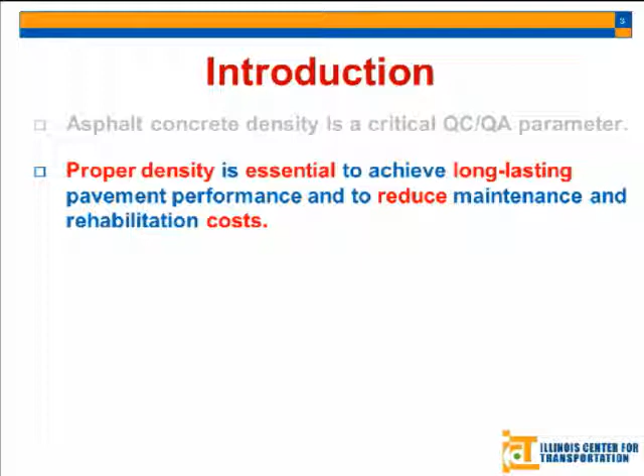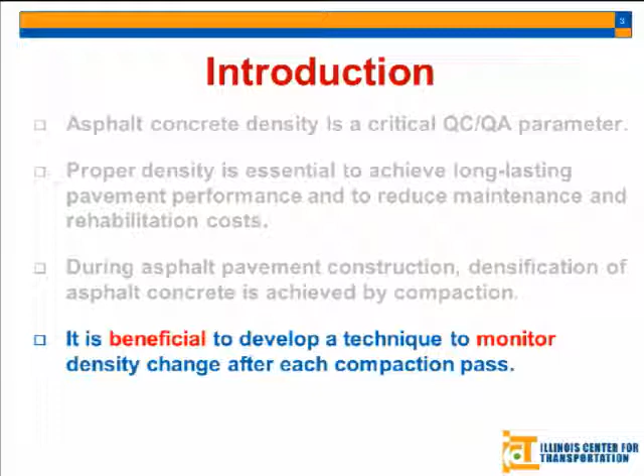During pavement construction, densification of asphalt mixture is achieved by compaction. So it would be beneficial to develop a technique that can monitor the density change after each compaction pass. However, no current technique can really achieve that.

Here are several techniques used for QC/QA methods. For example, the coring method is destructive and time consuming, and it can only give you information after construction—no information can be provided during compaction.

The nuclear density gauge uses radioactive material, so it requires certain licensing to operate and store. And its biggest limitation is that it's a spot test, so it only provides density information at certain discrete locations.

People then developed a new non-nuclear density gauge that doesn't use radioactive material. However, it's still a spot test, meaning it still collects density data only at discrete locations.

It also requires surface contact. The reason this is a limitation is because we want to achieve continuous and rapid monitoring, so if the tool requires surface contact, it cannot achieve that goal.

Intelligent compaction is a very hot topic now. However, its limitation is that it's based on the stiffness of the whole pavement system, and we know stiffness changes with temperature and subgrade conditions. So any measured stiffness increase may not be caused by increased density—it might instead be caused by a temperature drop or a change in subgrade conditions.

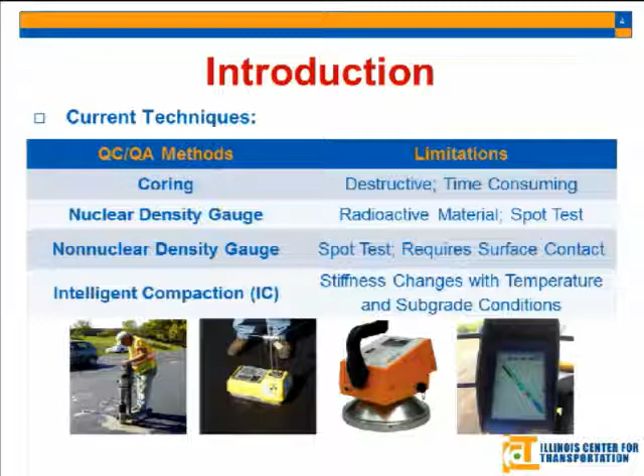So we want to find a way to overcome all these limitations and achieve real-time, continuous, and rapid compaction monitoring. That's why we turn to the GPR method.

Ground penetrating radar, or GPR, has been applied for thickness and density measurement and defect detection of asphalt pavement for many years, though density prediction is just being developed. The main advantage of this method is that it's non-destructive, non-contacting with the surface, and provides continuous measurement with high coverage area. It's very rapid because it can collect data at highway speed without any interruption to traffic.

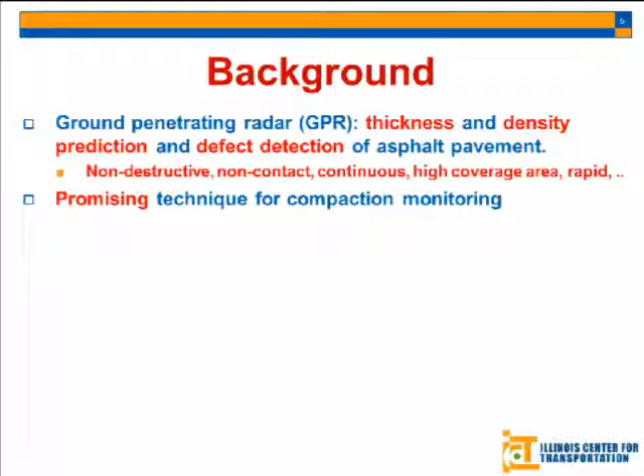So it's a promising technique for compaction monitoring. However, the biggest challenge here is GPR signal is very sensitive to water, and I'll explain why in the slides later. And the effect of this roller sprayed water on GPR signal is unknown.

As we all know, during compaction the compactor will spray some water on the roller to prevent sticking or picking up of the asphalt particles. And this water is having a big impact on GPR signal.

So we have achieved thickness and density measurement using GPR. Now the question is, can we apply the results or the theories used for density measurement and take one step further to monitor density during the compaction? As I said, the biggest challenge here is water, and we are going to tackle this water problem.

So far, for all the researchers doing GPR research, it's very hard to deal with water. There's not too much literature I found on measuring pavement with water. All the GPR tests require the pavement to be dry, or at least 3 days no raining, or maybe 1 week no raining, depending on the states and the specifications.

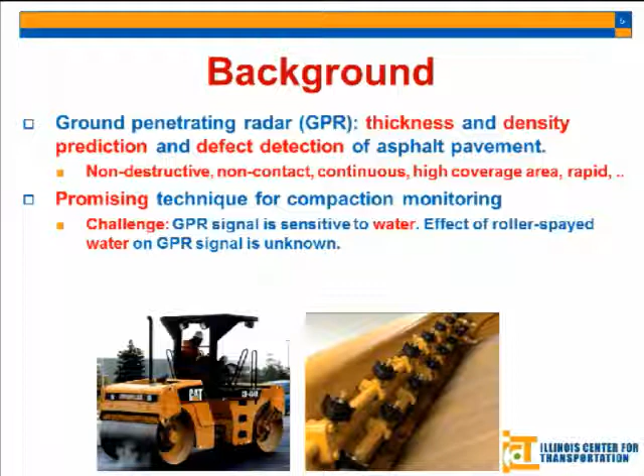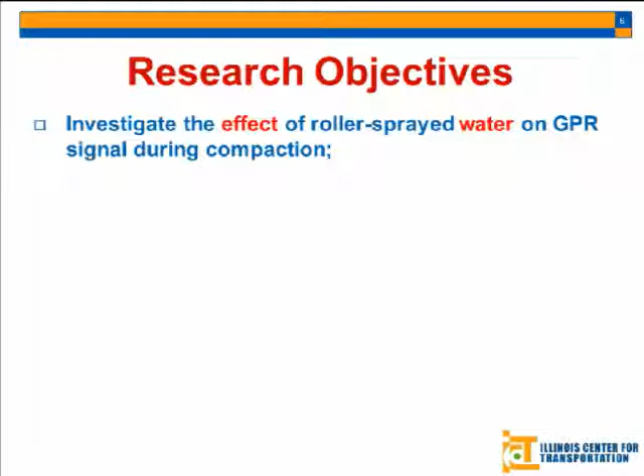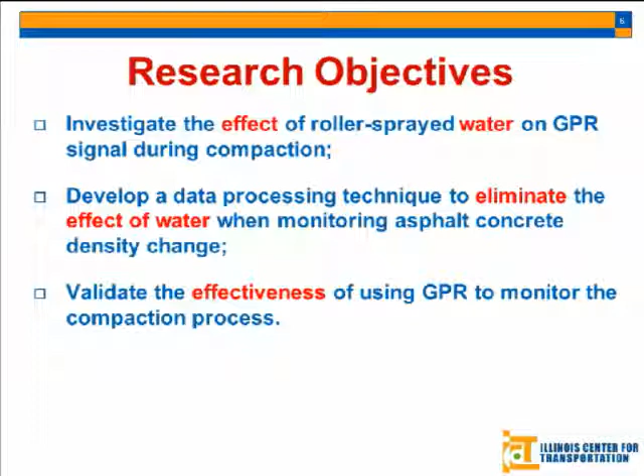So this challenge somehow defines our research objectives. First, we want to investigate the effect of roller sprayed water on GPR signal during compaction. Then hopefully we can develop a data processing technique to eliminate this effect of water. And then we are going to validate the effectiveness of using GPR, both the hardware and the software part, in the application of compaction monitoring.

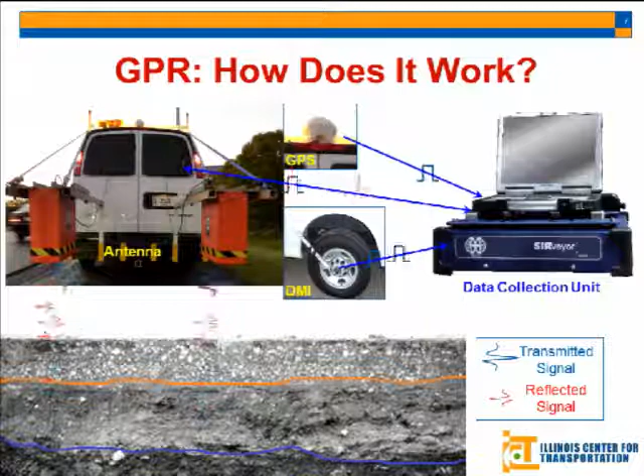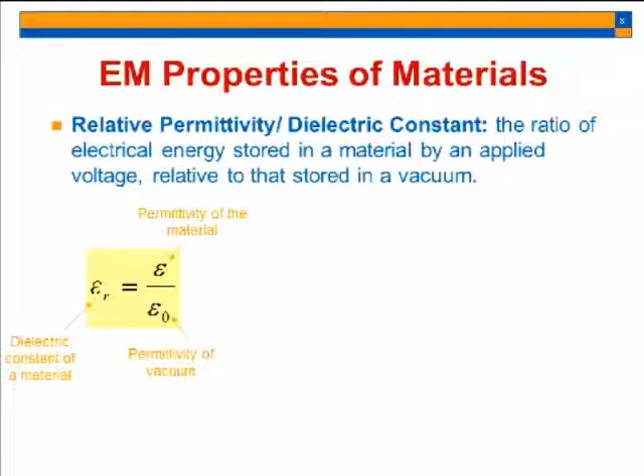This table lists several typical values of materials' dielectric constant. For example, as we said, it's relative, normalized to vacuum. So air has a dielectric constant of 1, asphalt concrete has a dielectric constant of 3 to 10, and water has 81. That's why water has a big impact on GPR signal.

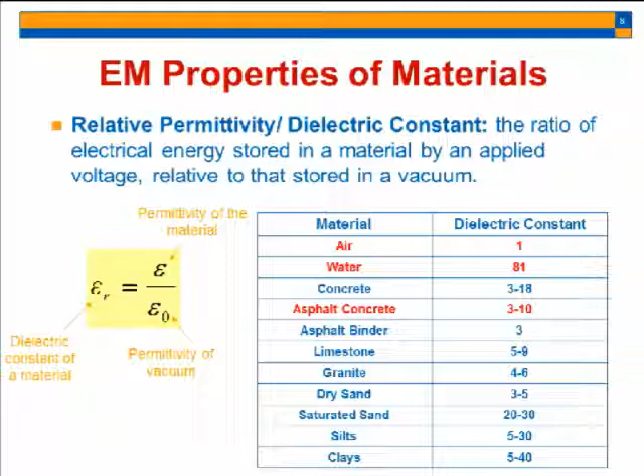I want to mention there's a relation between the dielectric constant of a material and its density. The denser the asphalt concrete is, the higher the value of dielectric constant is. So that's also the principle we can use to predict density or do density monitoring.

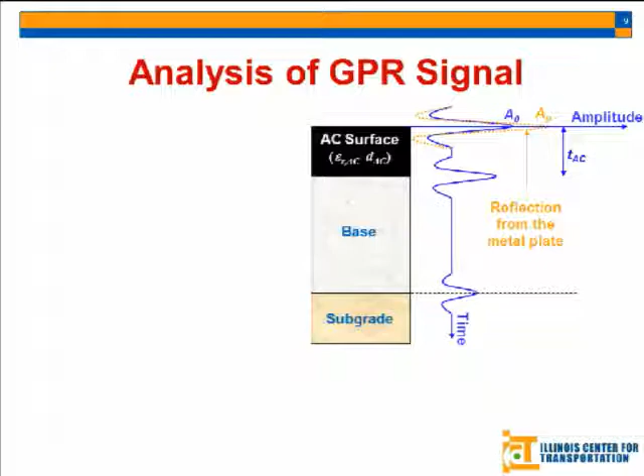This figure shows you how the EM wave, the GPR wave, propagates within the pavement. As you can see, there will be a surface reflection, there will be a bottom reflection, there will be a reflection here. We are only interested in this part of the signal because it reflects the property of this AC surface layer. We are not interested in anything below that.

There's an equation to calculate the dielectric constant of the AC layer. As you can see here, this AP is the amplitude of the incident wave, which can be collected by putting a metal plate underneath the antenna, because the metal plate is a perfect reflector, so you can know what you are sending out. And this A0 is the amplitude of GPR wave reflection at the pavement surface.

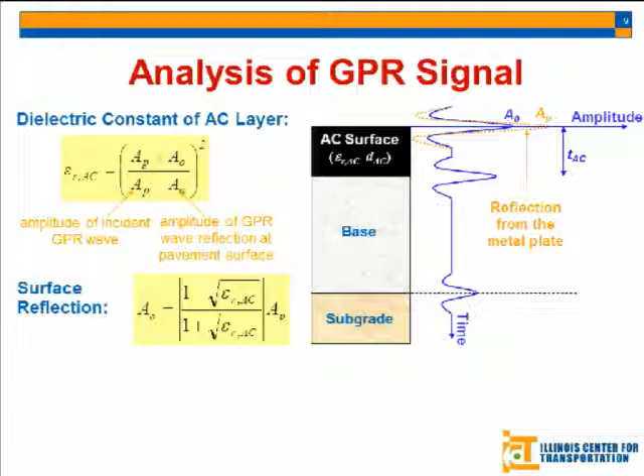In our application, we need to reorganize this. But these three equations tell us that the principle of density compaction monitoring is that when the compactor passes the asphalt mixture, the density increases. Based on this equation, when the density increases, the dielectric constant will also increase, and when the dielectric constant increases, the surface reflection amplitude will also increase. So when you place an antenna here, and the compactor passes repeatedly, you will find that the surface reflection amplitude increases and increases. That's the principle of how we monitor the compaction status.

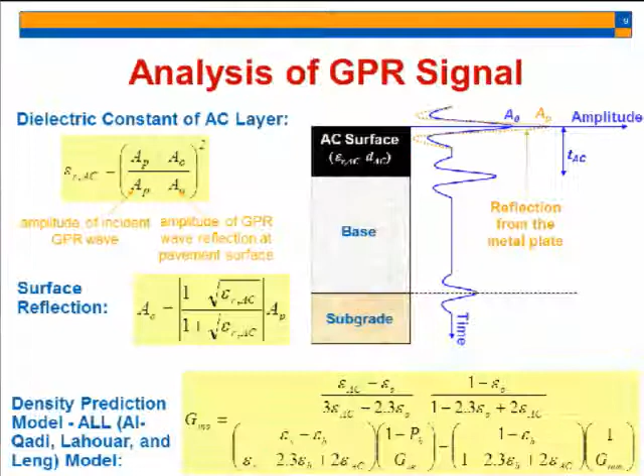However, these three equations are all based on dry pavement. As we said, the biggest challenge is water. So we are going to investigate how the water affects the signal.

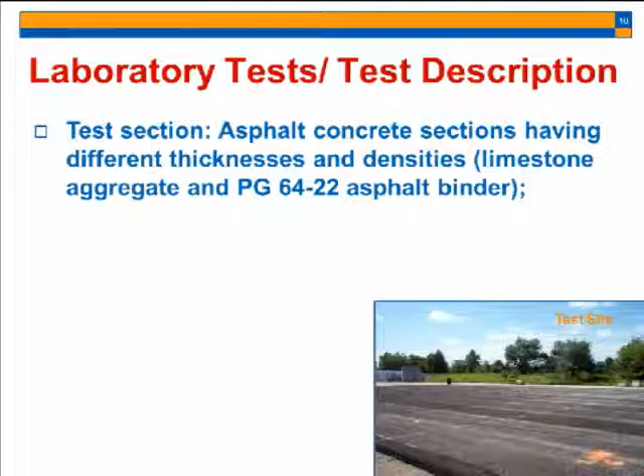We did this laboratory test outside the ATREL. There's a test section made of different thicknesses and densities, and we chose one lane made of limestone aggregate and PG64-22 asphalt binder. We use a 2 GHz air-coupled antenna. There are different frequencies you can choose for antennas, and this is the most common one for air-coupled systems. By air-coupled, I mean you don't need the antenna in contact with the surface, so we can collect data very quickly.

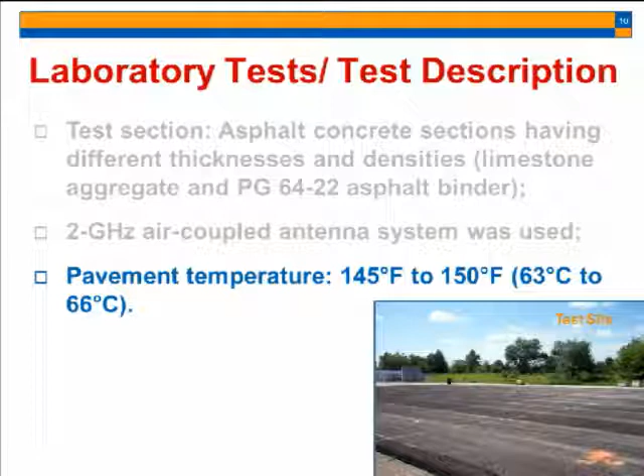The pavement temperature is pretty high because we did this test last summer. We wanted to choose the hottest day so that any water we sprayed on the pavement would evaporate quickly.

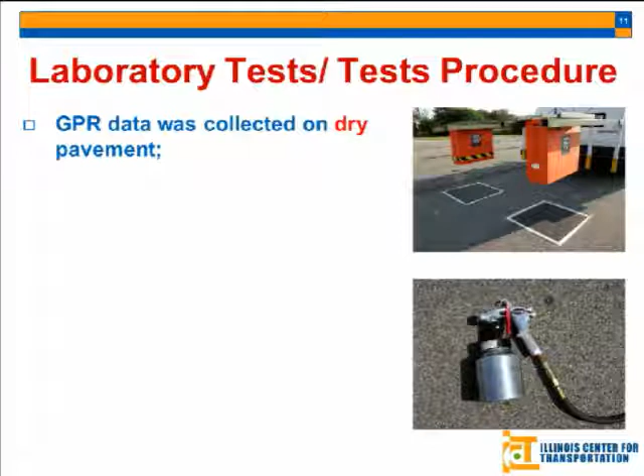This is the test procedure. We first collect data on dry pavement, which is pretty normal - we did this the same way for all the GPR tests. Then we did something special: we spray some water using a nozzle sprayer evenly on a square area. The amount of water is 250 milliliters. We got this number based on the specifications of a compactor manufacturer, to simulate how much water will be sprayed during compaction.

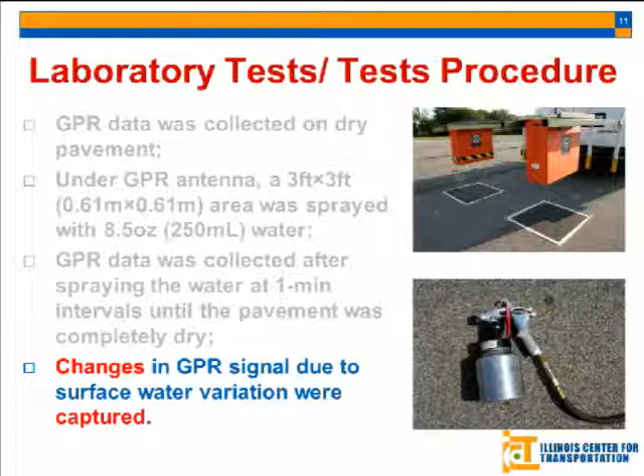Then we collect data after spraying water at 1 minute intervals until the pavement was completely dry. I found it usually takes around 1 hour for the pavement to be completely dry. In that case, we can capture the changes in GPR signal due to the surface water variation. Now I'm going to show you the result.

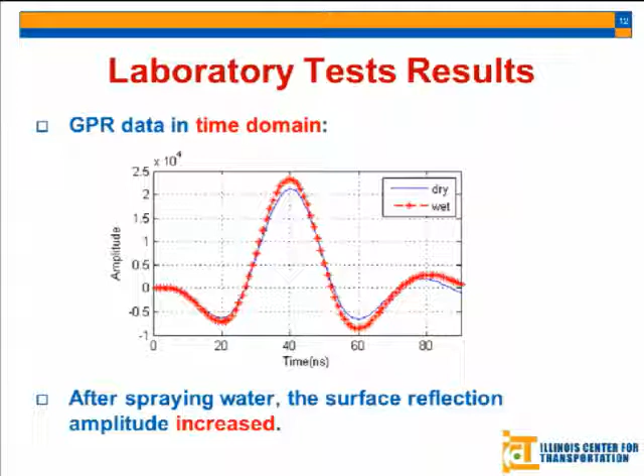So we have to investigate another data processing technique. Considering the GPR wave is ultra-wideband, we transfer it to the frequency domain. As you can see, these two figures are the surface reflection amplitude in frequency domain, simply obtained by using the Fourier transform. The x-axis is the frequency and the y-axis is the amplitude. The right figure is just the amplified part of the top part. The frequency components are from 0 to 3.5 gigahertz because it's an ultra-wideband signal.

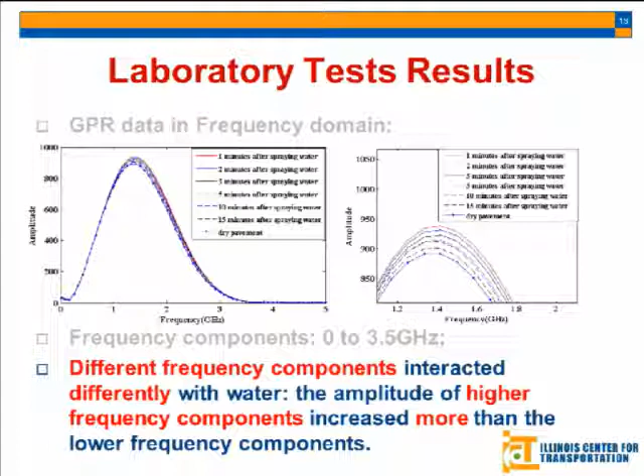As you can see on the right part, the blue curve is the data collected at dry pavement. When we spray water and collect data after 1 minute, this red curve raised up.

As it becomes dry and dry, it's getting closer and closer to the dry pavement curve. Interestingly, we found that this left part, as you can see here, all of the curves are overlapped, which means they are not changing. But the high frequency part changed a lot.

So as you remember in the previous slide, in the time domain, the curve increased a little bit, and that increase is actually accumulated from the contribution of all these frequency components. We found that most contribution comes from the higher frequency part. So different frequency components interacted differently with water, and the amplitude of higher frequency components increased more than the lower frequency components. This can be explained by some EM wave theories, and that has something to do with the relative size of the EM wavelength and the layer thickness.

When your wavelength is very big and the thickness is very low, you probably will not see that layer. On the other side, if the wavelength is very small relative to the layer thickness, then most of the energy will be reflected. So this can be explained by EM wave theory.

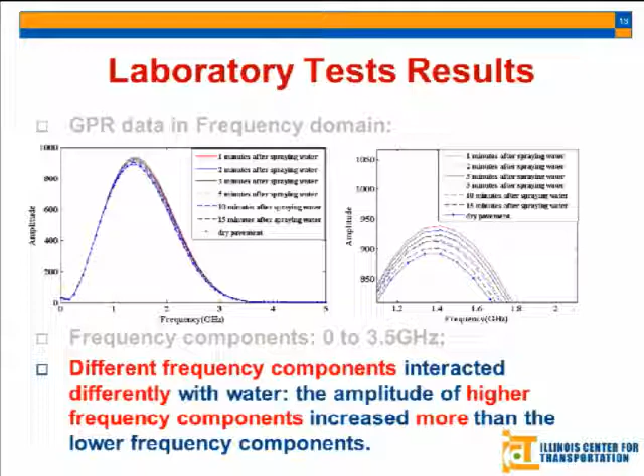Most importantly, we can use this feature. We can extract some feature that is insensitive to water. So we want to keep the left part of the frequency components and throw away all this right part, because these parts are affected by water. So in order to keep that part, we want to use a filter, and we use a bandpass filter.

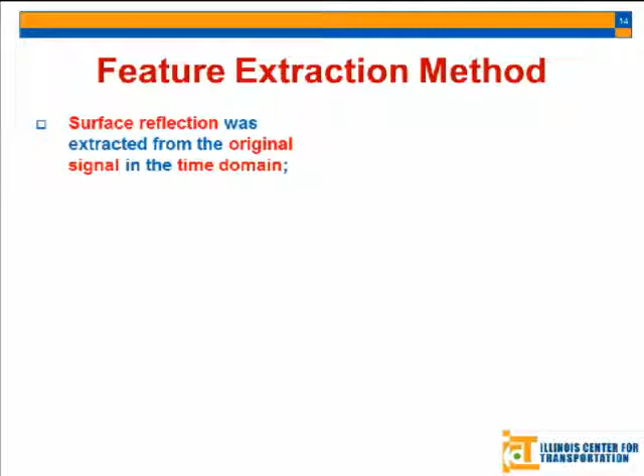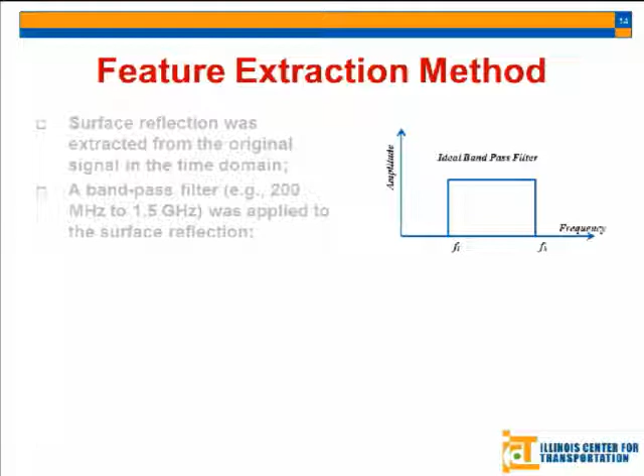So we need to investigate this feature extraction method because we don't know what cutting frequency we want to use and what cutting frequency gives us an optimized result. After applying the bandpass filter, the surface reflection will be reduced to a smaller value because we're throwing out a lot of frequency components and only keeping the frequency components within this region. So we can use this amplitude after filtering as our feature value because we know it's sensitive to density, but it might be less sensitive to water.

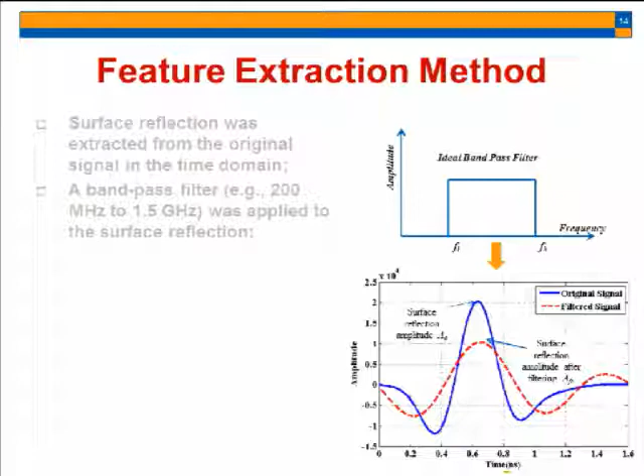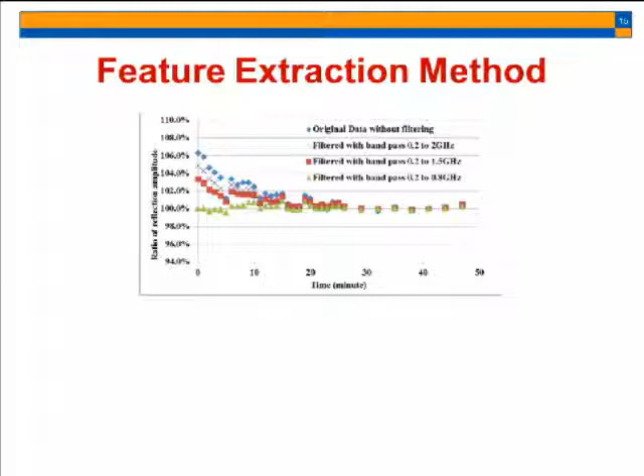So we keep changing the cutting frequencies, and we can plot them versus time. Here's the final result. This x-axis is the time after spraying water, so the higher the x value, the closer it is to dry pavement. The y-axis is the reflection amplitude, normalized to the data on dry pavement. As you can see, the original data without any filtering or data processing is this blue dot curve.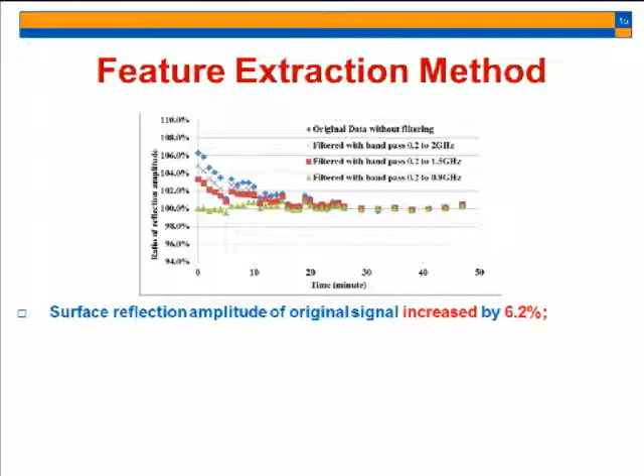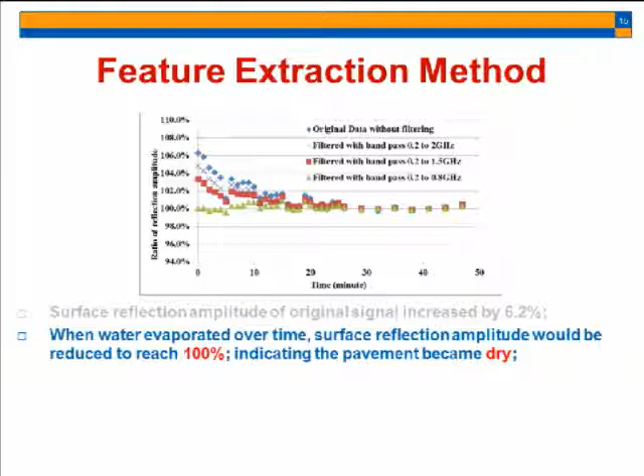As you can see, the surface reflection amplitude of the original signal increased by 6.2% when you spray water. And when the water evaporated over time, the surface reflection amplitude would be reduced to reach 100%, indicating the pavement became dry. When you apply a bandpass filter, for example from 0.2 to 2 gigahertz, which is this cross line, you find that the change in reflection amplitude after spraying water was smaller.

Finally, we found the optimized cutting frequency, which is from 0.2 to 0.8 gigahertz. We found that the feature value stayed around 100% regardless of the water amount, suggesting that this feature is insensitive to water. So this is a very good feature because no matter how much water you spray, as long as it's within that range, it will not be affected by the water amount.

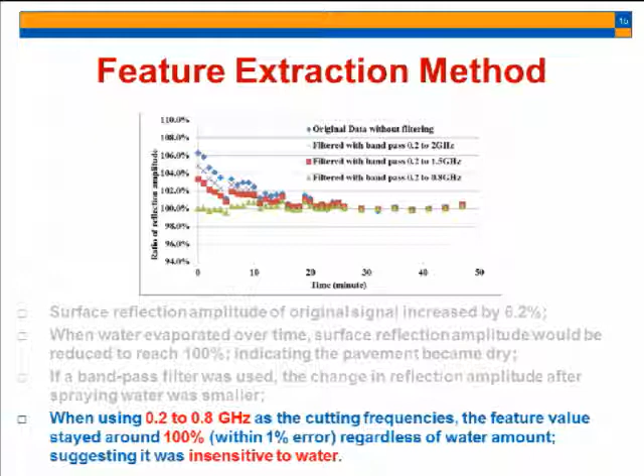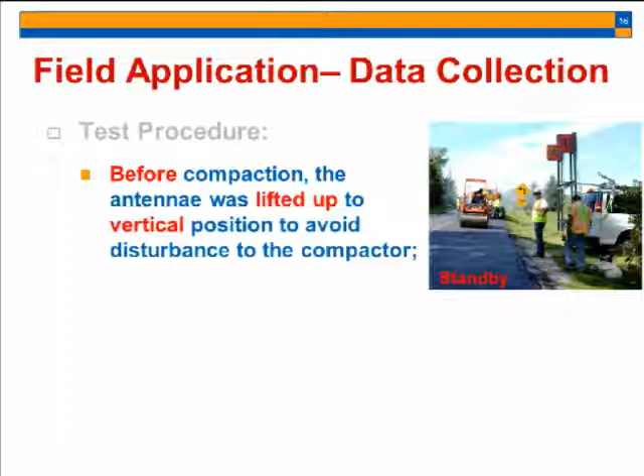So we applied this algorithm to a field project, and we also developed and modified the GPR antenna setup to be applied in the field. As you can see, this is our standby position, meaning that before compaction, the antenna was lifted up to vertical position to avoid any disturbance to the compactor. When the compactor passes, the antenna was lowered down to horizontal position to collect GPR data.

In that case, we can collect the GPR signal reflected by the pavement after each pass and at exactly the same point. It should be noted that this setup is very temporary, just for research purposes. In the future, we can incorporate and integrate this GPR antenna with the compactor, so we can do continuous measurement.

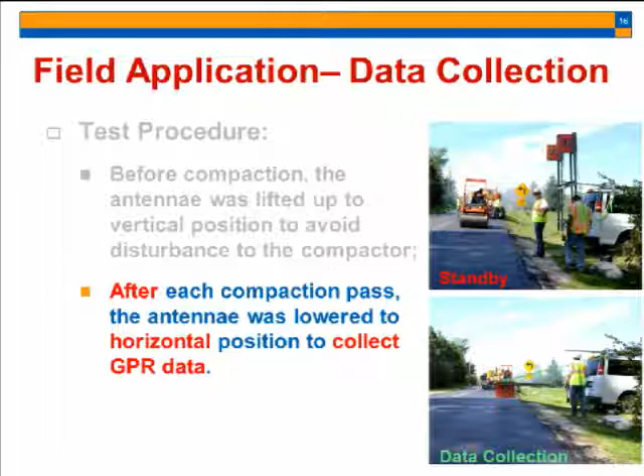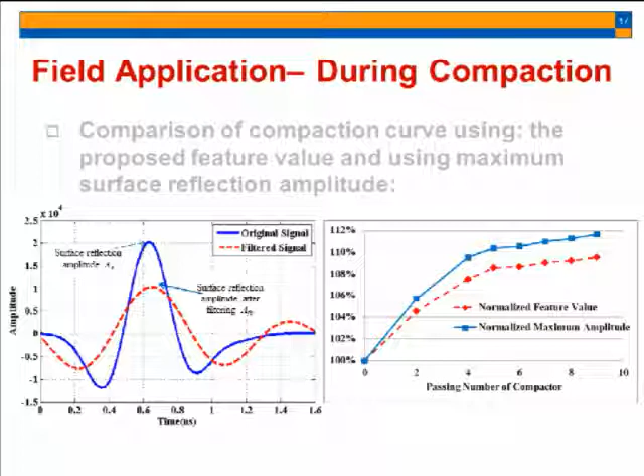However, if we don't use the data processing technique, the trend of this curve is partially contributed by the water. If you use this data processing technique, this effect of water can be eliminated. So this curve is closer to being totally affected by density change, without the effect of water.

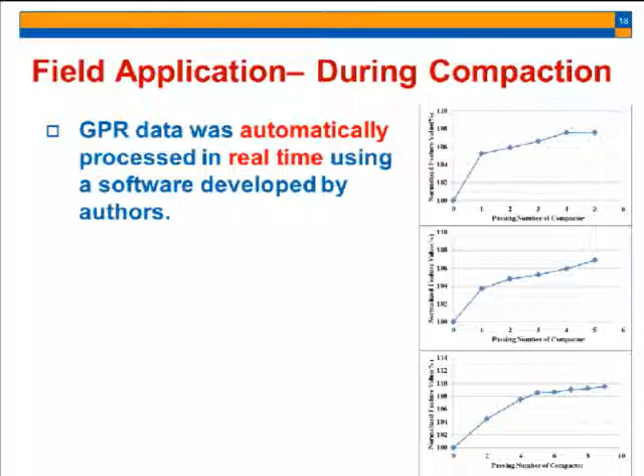We applied this method to 3 projects, and the data was processed automatically in real time using software developed by us. All 3 figures show a similar trend, which is the asphalt concrete density increased dramatically in the first couple of passes, then the increase becomes gradual.

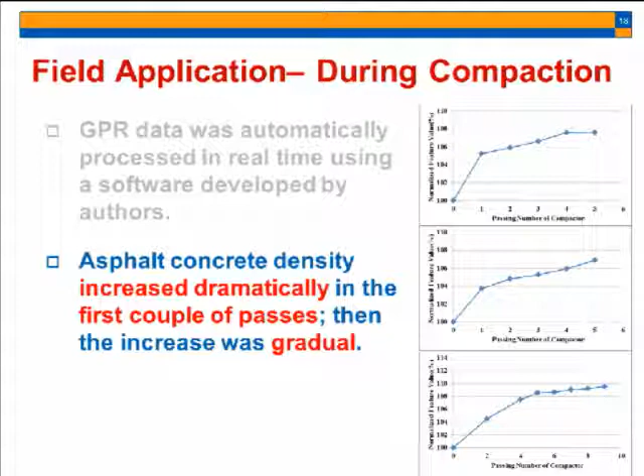After the construction, we want to apply the GPR method both during and after construction, to be a complete QC/QA process. So after the construction, we also did thickness and density prediction, and this can be done pretty quickly, collecting data at highway speed. So we can get the thickness profile, density profile, and the air void profile.

These 2 curves are 2 locations because we have 2 antennas, and we scan once but it scans two lines. As you can see, the thickness is between 2.5 to 3 inches, and the GMB is between 2.3 to 2.4, and this is the air void content.

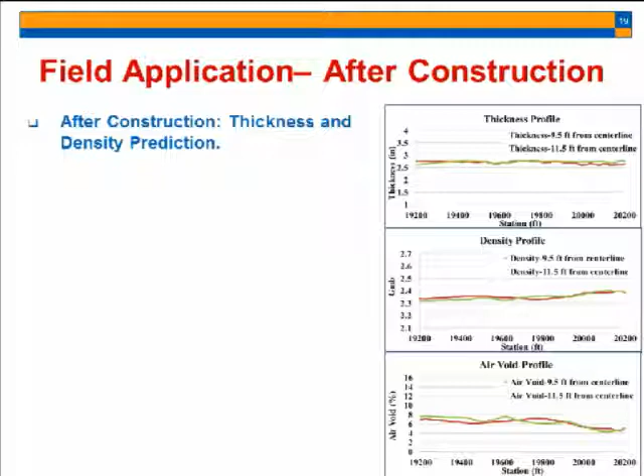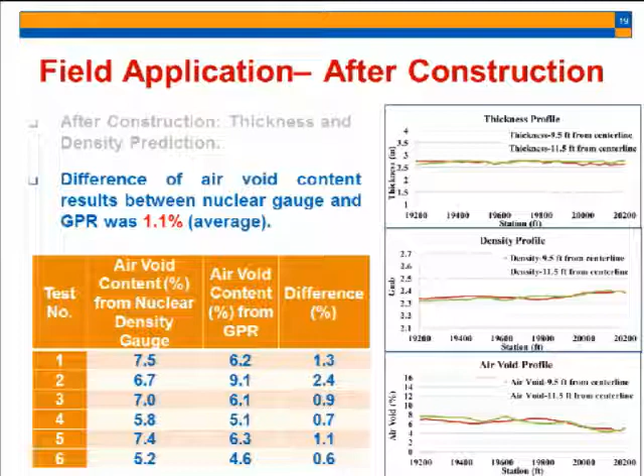We want to do some validation. However, the 3 projects don't allow us to take cores because it's newly constructed. So we compared our data with the nuclear density gauge, and we got 6 test locations. We found that the average difference between the GPR predicted density and the nuclear density gauge predicted density is around 1.1% on average, but this is not the relative percentage, this is the absolute percentage.

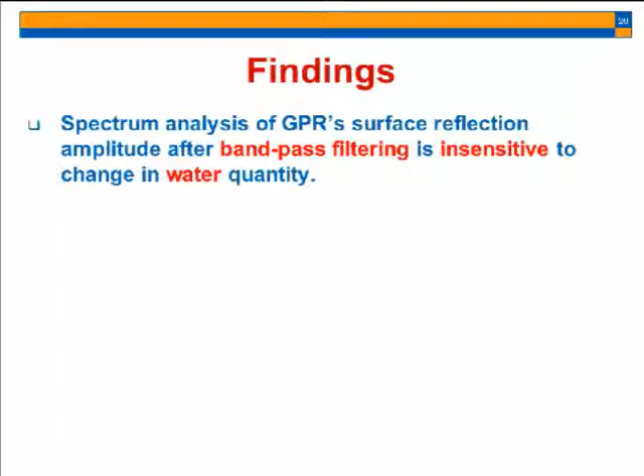Findings: the spectrum analysis of GPR surface reflection amplitude after bandpass filtering is insensitive to change in water quantity, and it can be successfully applied for real-time compaction monitoring during construction. It can also be applied to predict asphalt pavement layer thickness and density profiles after construction.

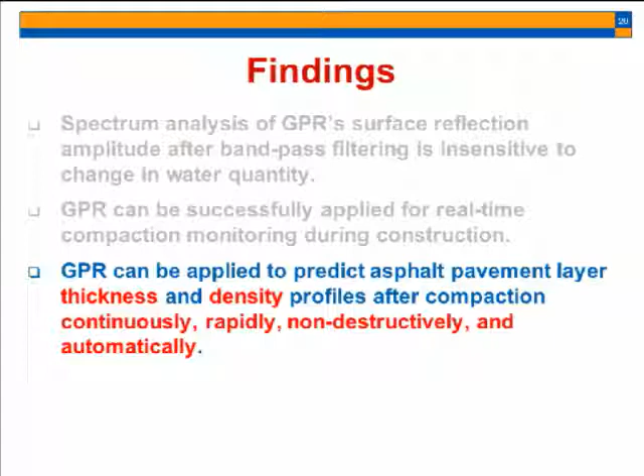It's continuous, it's rapid, it's non-destructive, and the data processing can be done automatically using the software developed by us. We found that the density data was comparable to density values obtained by the nuclear density gauge.

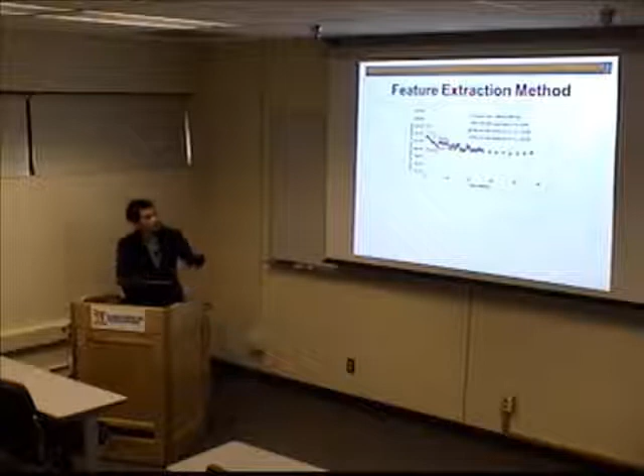But in principle, should we not have a theory to be able to do this? Because we know the dielectric constant of water, we know the thickness of the asphalt layer, and if we know everything, we can simulate the electromagnetic wave penetrating and getting reflected. That's a very good question, but this doesn't apply for this application.

The reason is you don't know how much water you sprayed. So when I tackle this problem, there are two approaches I can go. First, I want to develop some theoretical things to eliminate the water, but by doing that, you have to know exactly how much water you sprayed.

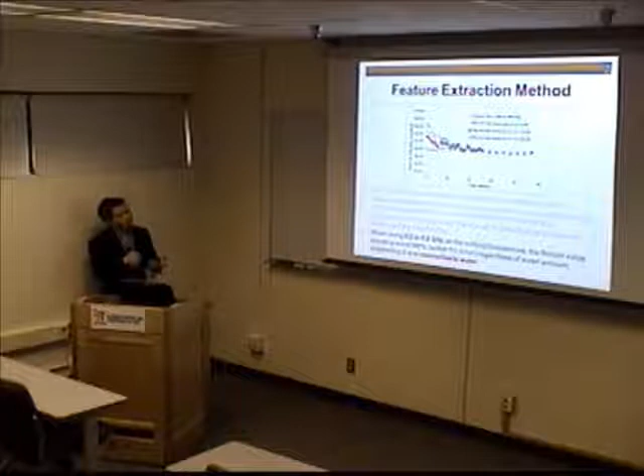So I go to another direction, which is no matter how much water you spray, you always need to eliminate the effect of water. As you can see here, at zero time is when you have the biggest amount of water, and at, let's say, 45 minutes, it's close to dry. Within this range, you always have a varying amount of water, so you cannot use a theoretical approach to deal with this problem.

Just to follow up on that, I have a question also. Now, I understand you're dealing with surface reflections, right? Right. And that's the surface, the top lift you're trying to get the density from. But also, we know that different antennas with different frequencies generating EM waves have different depths of penetration, which you also mentioned.

And usually the higher the frequency of the antenna, the shallower - but you're doing much better, more detailed scans, correct? Right. Do these frequencies ever link with the depth of penetration, or is this something different? Well, as you said, the lower frequency usually has a larger wavelength, and it can penetrate more.

Here I'm using that theory, which is for larger wavelength or lower frequency - it's not only penetrating more, it's also insensitive to a lot of things. It's insensitive to small stuff. Just like if you want to detect some very small stuff, and you use a lower frequency and higher wavelength, you are not going to see it. For finer detection, you want to use higher frequency.

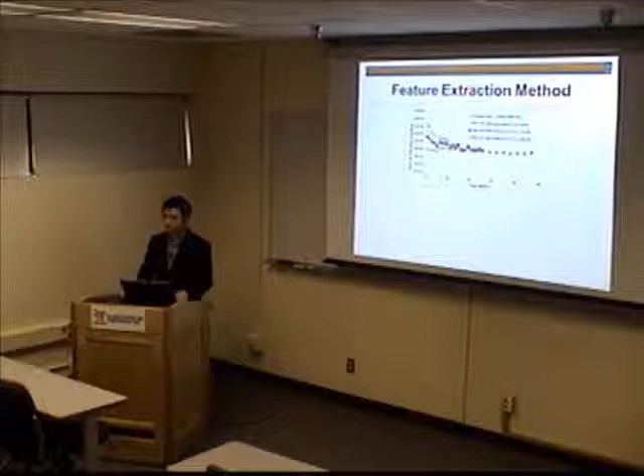Okay, can I have another last question? Yeah. You gave a formula for GMB calculation. Yes. Can you throw some light on how that formula was derived? Was it purely empirical? Oh no, it's totally based on... it's like MEPDG. Okay, so it's partially theoretical, partially empirical.

The theoretical part is there's EM mixing theory, which has nothing to do with the GMB - or this, called the GSE, I think is the density of the aggregate.

EM mixing theory tells us that if you have a big mixture with, let's say, 3 phases, and each phase occupies a certain volume with its own dielectric constant, the theory tells us what's the total effective dielectric constant for the whole mixture.

Then we apply this theory to pavement by introducing these parameters. Does it look like a weighted average, or is it more complex? A weighted average would mean volume times dielectric constant plus volume times dielectric constant, divided by all the volumes. But no, it's more complex than that.

As I understand, those are also the ingredients, like in HMA there's the aggregate component and the binder. B stands for binder, S stands for aggregate, right? Yes, I remember from Zen's original work.

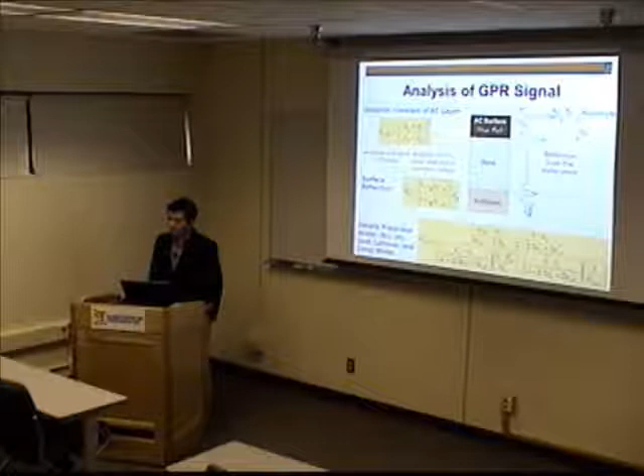Just to add to that, he's trying to simulate the effect of water coming from the roller, because the roller compactor adds that water on the surface—that's basically how water is generated there. And it evaporates very quickly, and it's a very small amount. If you go to the field and look carefully, I think you'll get the same conclusion as me, that there's no water inside. So that's how I start this problem.

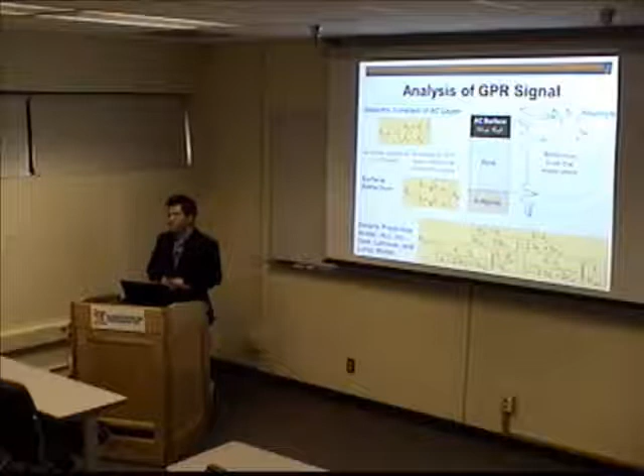If it's totally saturated, I will not touch this topic—there's no way. So many years GPR researchers have wanted to do this, but no way.

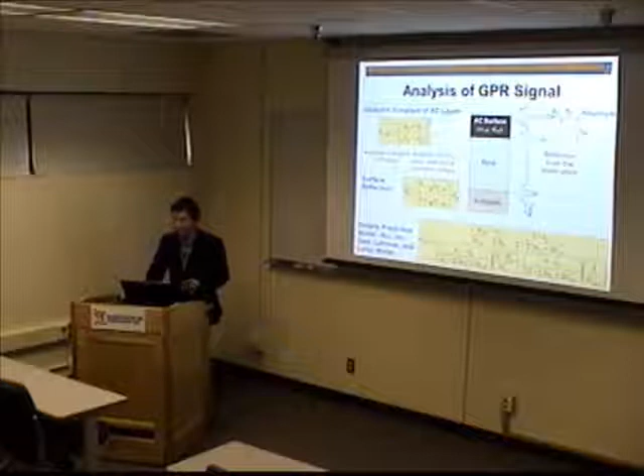Regarding your next question, whether the algorithm developed based on laboratory tests can be applied to the field, since the field has a lot of variations—well, this is just phase 1. As you can see, I'm only showing you the trend. I'm not telling you what the density is after one pass, and after another pass. I'm only telling you the trend.

And that's my next research topic for my PhD, so I'm going to keep it a secret for now. In the future, you can attend my final defense to know the answer—spoilers, right? Sounds good. Any other questions?